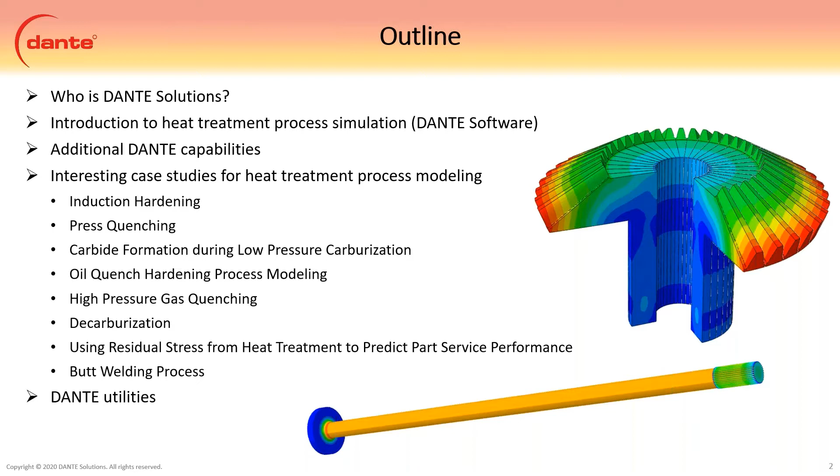A quick outline: who we are as a company, and then an introduction to our software. We also have additional Dante capabilities available within our models, and then some interesting case studies, which include induction hardening, press quenching, carbide formation, oil quenching, high pressure gas quenching, decarburization, and then using residual stress and loading models to predict part service performance, and a quick animation of a butt welding process. We'll wrap things up with a quick overview. Also, we have some Dante utilities available to help evaluate material and to get material parameters into the Dante model from experimental results. We'll go through those quickly though.

A brief introduction to who we are. Dante Solutions was founded in 1982 with a main focus on modeling thermal processes, and in those early years a lot of it was on forging simulation. However, in the early 90s, Dante Solutions was brought into a large collaborative project between industry, academia, and our national labs, and the purpose of this was to predict distortion in heat treatment.

This project ran from 1992 to 2000, a long project that really tried to nail down the physical phenomena of heat treatment and the resulting distortion. This was brought about because industry was having such a difficult time with heat treat distortion and the amount of money they were spending on scrap. Dante Solutions then became the sole owner of the Dante software in 2000, and we've been responsible for the development and furtherment of the software since then. A lot of work has gone into the models, the algorithms, and the material data.

So this has been a 20-year adventure, we'll call it. Originally, the name was Deformation Control Technology. So if you see any papers or publications from prior to 2014, you might see that name associated with our employees, particularly Lynn Ferguson and Charlie Lee. Also, we had an employee that did a lot of publications back in the day, Andy Freeborg. So any of those guys, if you see their names on papers with Deformation Control Technology, that's us.

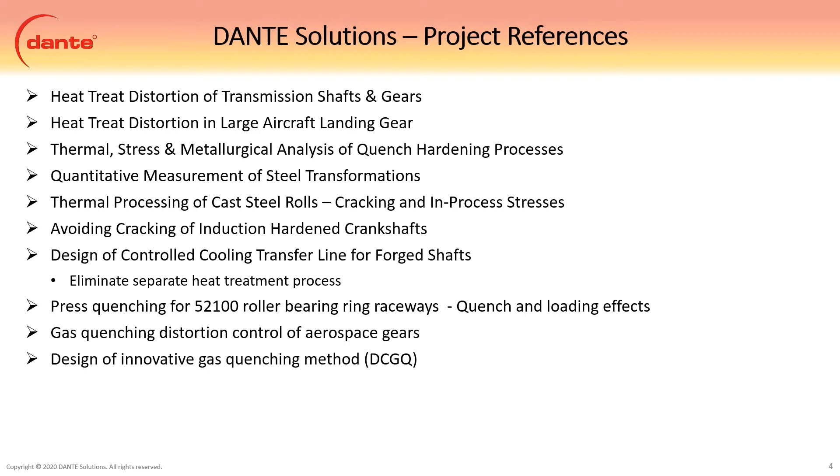We've looked at normalizing processes to improve them, bearing rings, gas quenching distortion of aerospace gears. And the last one is we actually recently designed an innovative gas quenching method that we've tagged Dante Controlled Gas Quenching, that actually controls the temperature of the incoming gas to control the phase transformation gradients. It's a great means to reduce shape distortion from the non-uniform transformations that occur during gas quenching. You can't get rid of the size change from going to martensite, but you can get rid of shape change.

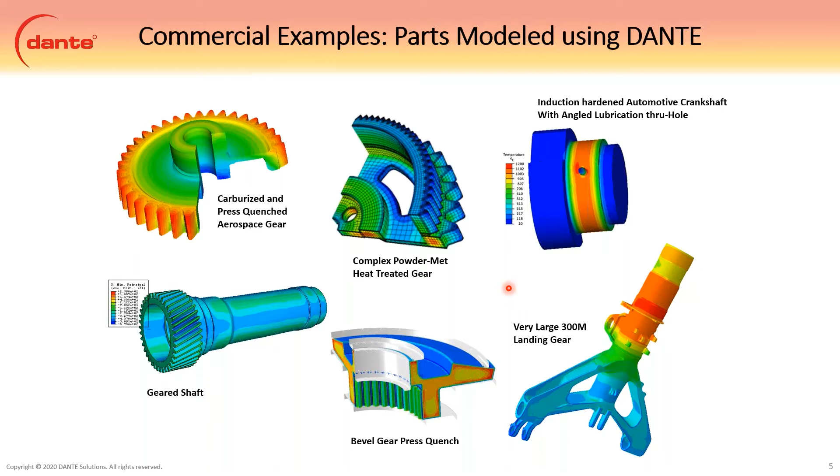All right, so what is Dante heat treatment simulation software? It is a commercial finite element based software that is used with ANSYS or Abaqus. So in order to use Dante, you got to have ANSYS or Abaqus. And we did this so we did not have to focus on the actual solving - there are great solvers out there, and those folks have put in a lot of work and effort to optimize their solutions, so we just use their ready-made solutions for the solvers. And most engineers are familiar with Abaqus or ANSYS, so it's kind of a streamlined transition to start using Dante.

I was going to try to show some quick examples, but I just found out that my license for Abaqus expired this morning. We're all still working from home, so I have to borrow licenses, and yeah, it's expired. So I'll try to do something, but I can't promise anything at this point. That's kind of my fault.

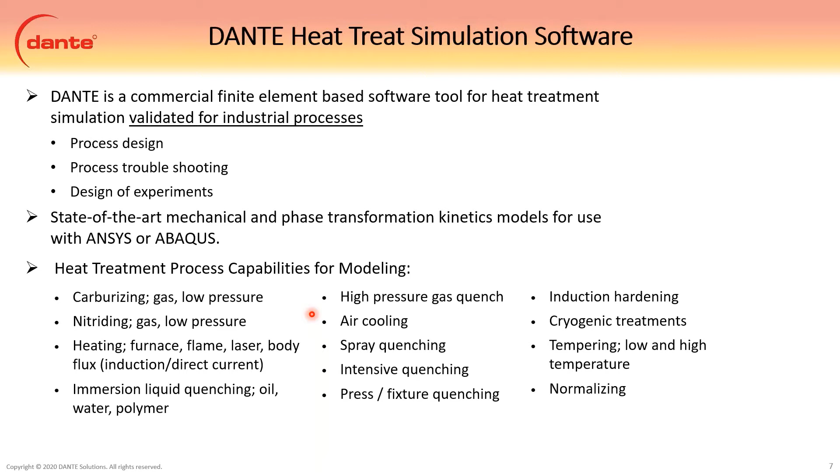The dotted lines are less important. We do have models for them, though generally we don't use them, mainly because the deformation is small, and particularly the heat generated by plastic deformation isn't needed. However, if you do forging models and you want to include the transformation after cool down, then it should be used.

This is particularly important for things like sheet metal stamping. Like I said, we need phase transformation, multi-phase mechanical, TRIP models. We've got to have a mixture law in there because you can have elements that are more than one phase at the same time. And then tempering models, as well as carburization and nitriding models.

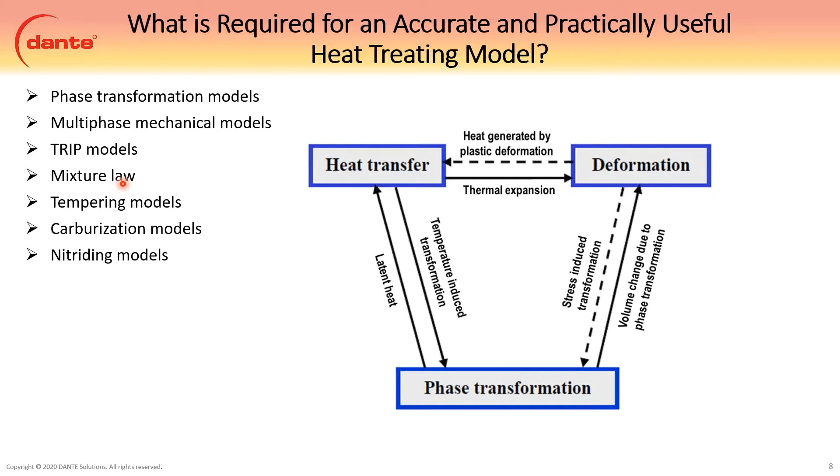So all of this must be included to accurately model a heat treatment process. Heat treatment modeling is probably one of the most complicated phenomena to model because of the wide temperature range and the wide range of solid state phases that are possible. So there's a lot to consider here. This is why we've been developing it for the last 30 years.

So, Dante function structure: everything we do here is heat transfer driven, and generally we use heat transfer coefficients. Flux can be used, but it's a little bit harder to know exactly what the outside environment conditions are when you use flux. So we use heat transfer coefficients.

Diffusion, phase transformation, mechanical models - all of this is included, as well as a standard database. So if you're using a common grade of steel, or one that's reasonably close to a common grade of steel - and I know India uses different standards for steel than America, but generally they're really close.

And then also there's a custom user material, so we can add a custom material that is specific to your company, so we don't have to share that with everybody else. That's if you want to do the testing and fund projects to get everything fit, or you can do the fitting yourself, but there is that capability to have your own material data for your specific grade of steel.

Finite element based, and then our outputs include volume fraction of phases, dimensional change, residual stress, and hardness. And everything except for hardness, because it doesn't make sense, is predicted in process. So you can see the changes as they occur, so you can see where your problems happen, or when the good things happen, right? So it's a very powerful tool in that regard.

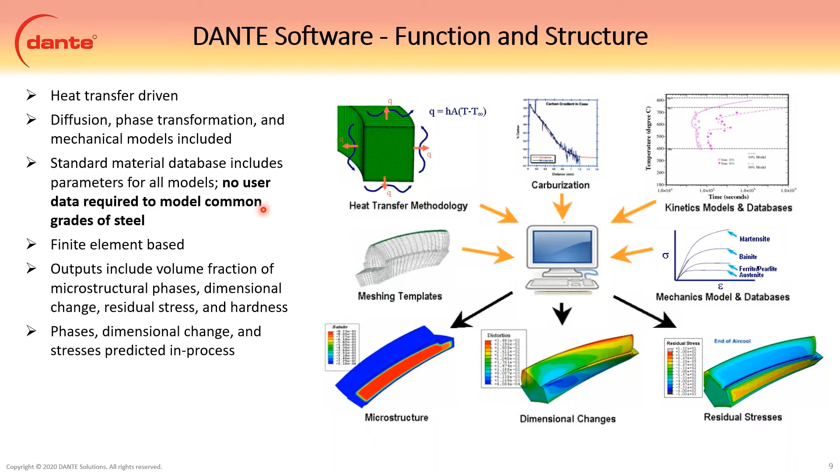You're just not getting what happens at the very end, because you can measure that physically. It's what happens during the process that we're really concerned about here. So that's where Dante is a very powerful tool.

Our file structure here, real quick: we got our user subroutines, and as I mentioned, you've got to have ANSYS Mechanical or Abaqus Standard to link with. There's a small processing database that has generic heat transfer coefficients for oil quench, air cool.

I think there's a water quench in there, oil. So there's a couple of furnace heating options. So there's a couple of generic data sets to start from. If you don't know your system behavior, we can at least get in the ballpark, at least get close.

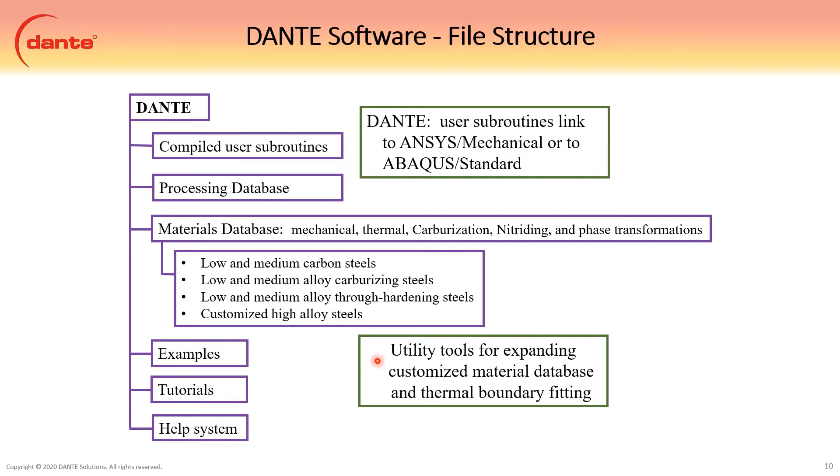Then we have our material database. I think I have a figure in the coming slides that shows some of the steels we have. Then we have a bunch of examples so you can see how certain models are set up, some tutorials that go step by step in setting up some simple models, and then our help system. Like I mentioned, we also have some utility tools available.

All right, so the way that we normally run these is we sequentially couple them, which is the figure on the left. So we'll run a carburization model and get a carbon distribution. That carbon distribution will then get mapped to what we call a thermal model, which will be the actual heat treat processing steps. That'll get us our temperature history, which is then read by the stress model, which gives us the distortion, residual stress, and microstructure. So it's a three-step process, and because the distortions are small, it's possible to do it like this.

If the distortions are larger, like for hot stamping, then you can couple the thermal and stress, but it generally takes a little bit longer to run, but the accuracy is better. And if you have large deformations, it's necessary because the thermal properties can change a lot quicker.

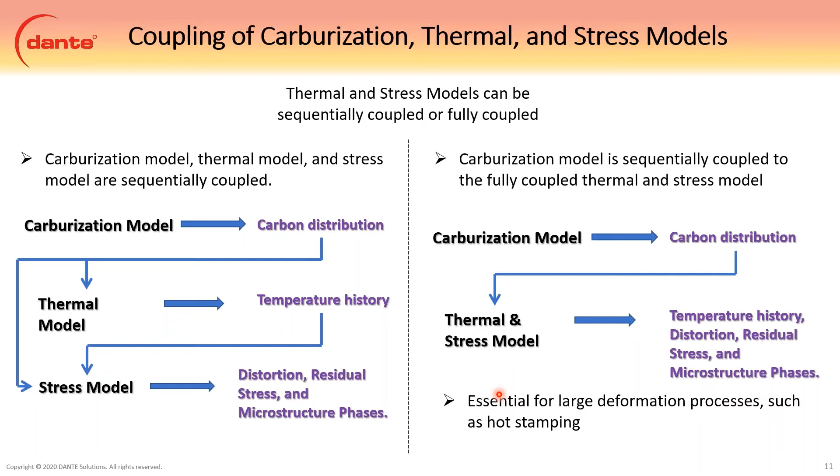All right, our models. Below on the left is our general form of our phase transformation models. For obvious reasons, I can't put the full model here, but it can be determined from dilatometry or TTT diagrams.

However, we do prefer dilatometry data because it provides diffusive and Martensitic phase transformation information. It provides the coefficient of thermal expansion and the transformation strains. So we get a lot of information out of one test, whereas the TTT diagrams just get us the diffusive transformation information. There's nothing about martensite except for a start and a finish temperature generally, and there's no thermal expansion or strain information at all.

So if it comes from TTT diagrams, we just assume something close and we borrow that strain. So we can get reasonably close, but it won't quite be accurate. So dilatometry is the way to go if you're going to measure phase transformation behavior.

The figure on the upper right is our representative internal state variable model. And we use an internal state variable model instead of the classical stress-strain relationship because it captures the hardening and recovery that happens during the process. And that's not possible with a conventional stress-strain relationship. So the internal state variable model handles all of that.

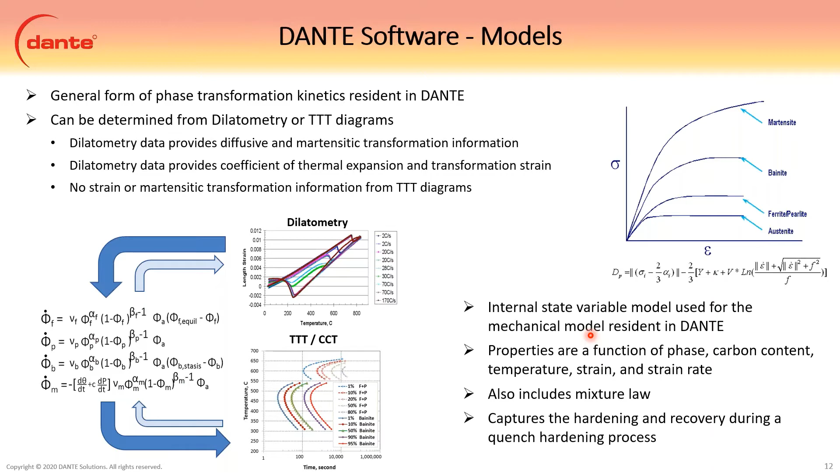All right, so here's our material database. You can see some of our standard materials. Any of these materials that have an XX at the end indicate that there's multiple carbon levels of data.

So the carburization process can be modeled more accurately because carbon has such an effect on material properties, it has to be considered. So we can see 4000 grade, 4100 grade, 4800, 5100, 52100 bearing steel - so it's just got one carbon level in it - 86, 9300. So you can see the common grades, especially to aerospace and automotive.

But inside of that material data is phase transformation properties, thermal and mechanical properties, carbon diffusion, nitrogen diffusion properties, and also microstructural and alloy effects are all included in these material properties. So this is a big deal because it's a lot of data for each material that has to be tested for. So to have this coming in is very helpful.

And like I said, if you're close to one of these - and this isn't all of them, there's more, I couldn't fit them all here - if you're close, then generally we can make some small modifications to the hardenability if it leans one way or the other relative to these alloys, and at least get you close without doing any testing. And then you can do some minimum testing to kind of fill in the blanks. So starting from here, a lot less testing is involved.

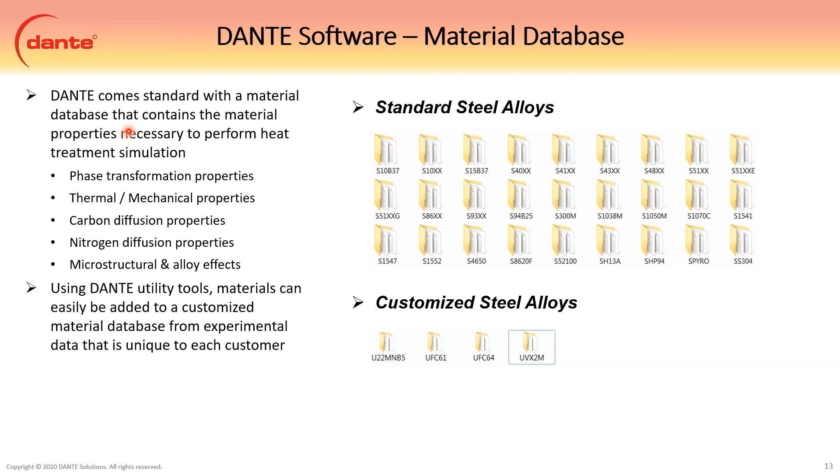All right, thermal boundary conditions are absolutely critical, and each system will behave differently. Even identical equipment models will behave differently. It's just a fact of nature that every heat treater has to deal with. So we highly advise that vessels be characterized - heat transfer coefficients as a function of part surface temperature should be tested for and determined. We do offer advanced support for that, and we have done a lot of testing as far as heat transfer characterization goes. So we are very experienced in this.

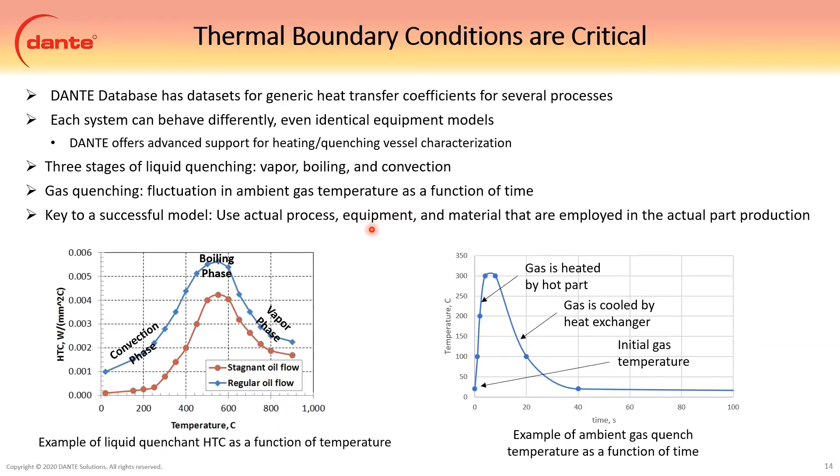This was a large landing gear with thermocouples welded onto the surface. We actually prefer to get them embedded just a little bit, but this works. Then we build a model and fit the heat transfer coefficients from there.

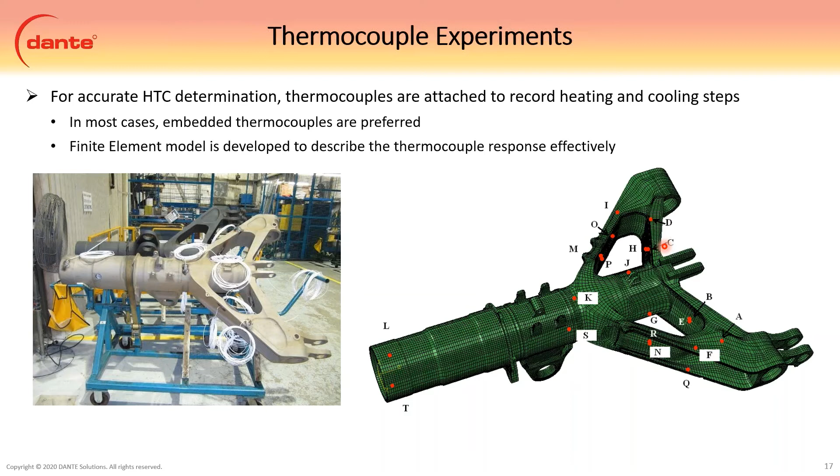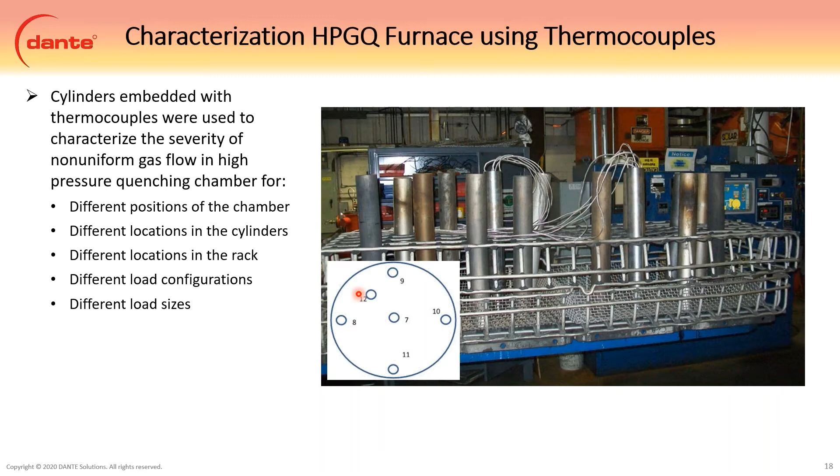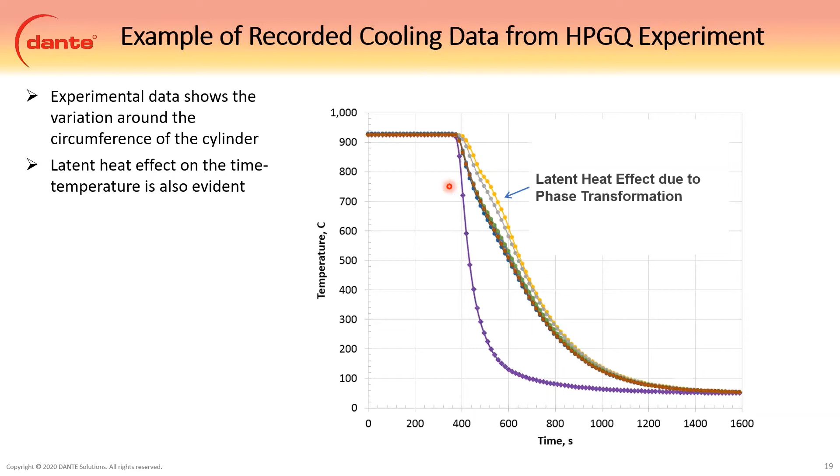These are the thermocouple temperature measurements that go around the cylinder, so you can see there's a difference circumferentially due to the gas flow. You can also see the bump here, that's from the latent heat during the assumed ferrite pearlite transformation.

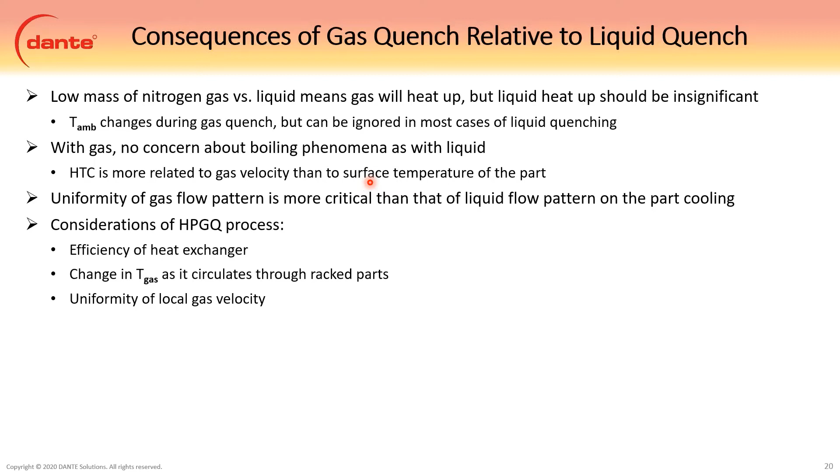We can skip this, I'm pretty sure he shared this. You guys can read this just really quick, what the difference between gas and oil is and what needs to be considered, but I want to get through some of this other stuff.

Other Dante capabilities: we can consider the alloy composition on phase change. This example shows if our molybdenum goes from 0.2% to 1.2%, you can see the shift in the ferrite pearlite and bainite noses. Everything goes to the right, so it essentially makes it more hardenable.

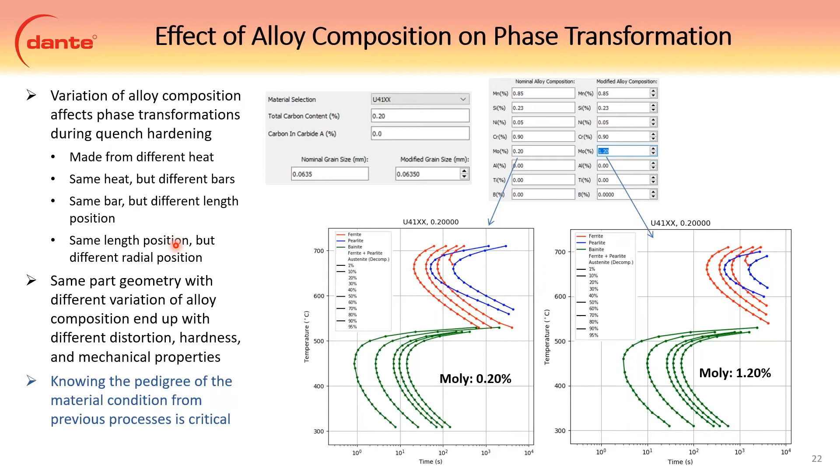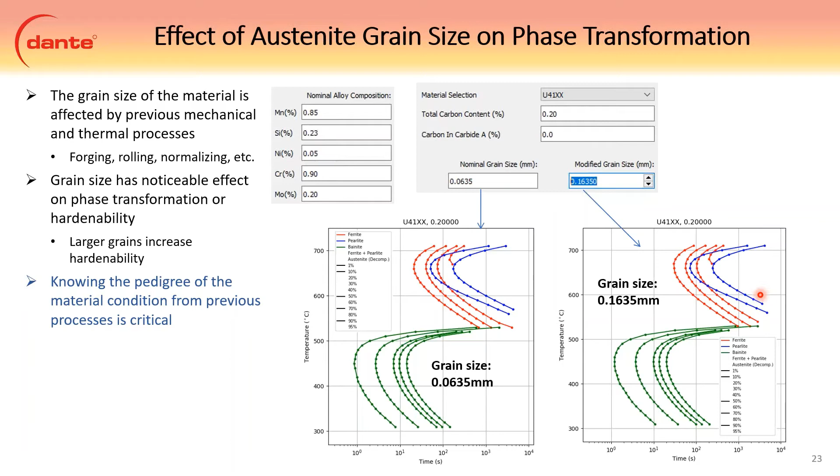We can also consider the effect of austenite grain size. This grain size is in millimeters, so we're from 63 microns to 163 microns. Again, you can see the shift to the right, so larger grains make it more hardenable.

The effect of initial phase on phase transformation. The first cycle here is annealed condition, most likely ferrite pearlite. Then this blue line is the retest of the same sample after being quenched to martensite, so this blue curve starts as martensite. This volume shrinkage that you see here is actually the material being tempered at high temperature, and you can see the effect on the transformation strain and total strain from the austenite transformation.

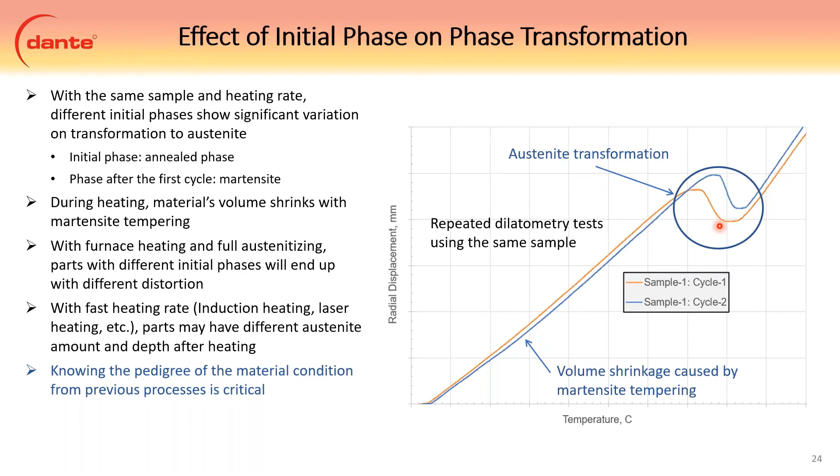So depending what phase you start with, you're going to end up with different strains, and this shows it really well. The blue line is starting with pearlite. These are all simulation on this figure. This figure was actual test data, so this other figure is all simulation.

The second is high temperature tempered martensite, and the gray curve is low temperature tempered martensite. You can see they all start at the same place, but they all end at different places. So the start of the initial phase is absolutely critical. It is really important to know your initial material structure, phase, grain size, alloy composition - all that's very important to know.

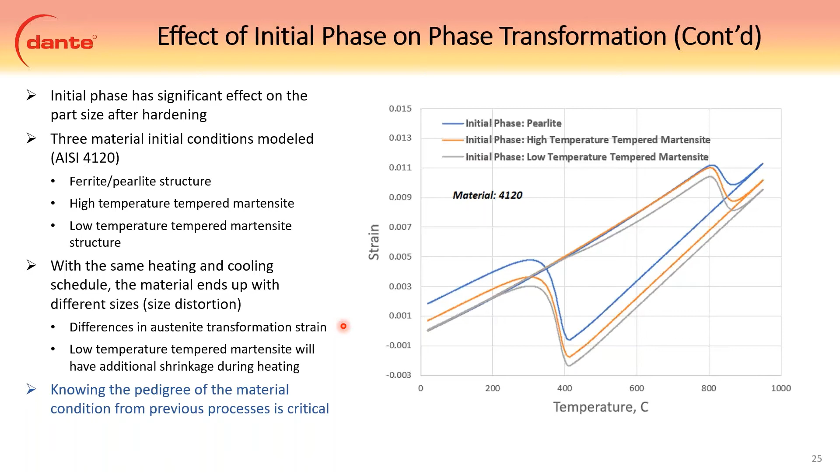We can also model the effects of initial carbides on phase transformation, and it affects the phase transformation, because all that carbon that dissolves from the carbide then goes into the surrounding austenite matrix, which raises the carbon of the austenite, which then increases the hardenability.

So these top left and bottom two all show 850 with a medium size carbide, small carbide, and large carbide, and you can see this is the carbon going into austenite. The small carbide dissolves really quick, whereas the large carbide dissolves very slowly and doesn't even fully dissolve in this time. Then this is the medium carbide size figure on top right at 950 instead of 850, so you can see we go a little bit quicker at higher temperature dissolving.

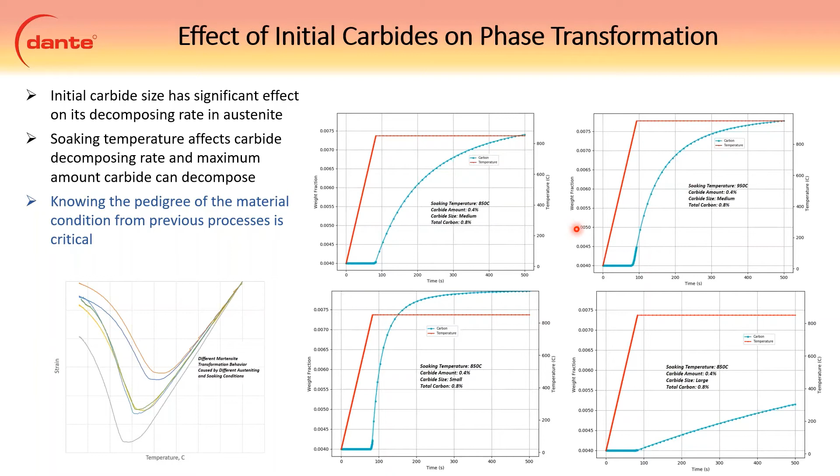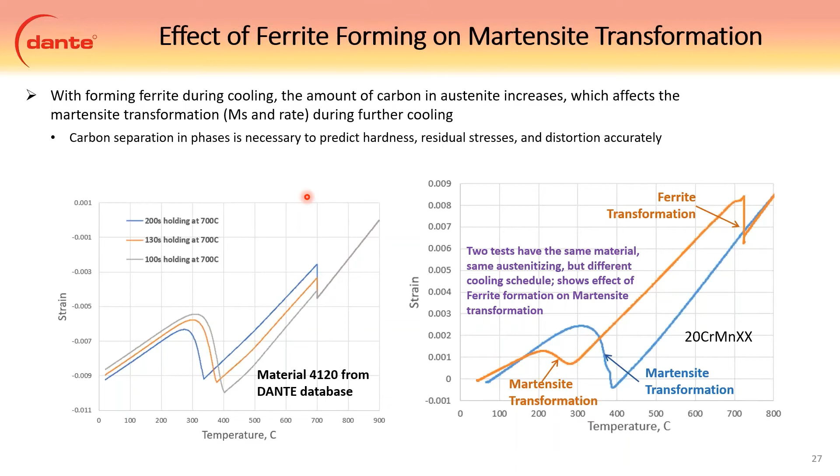The effect of ferrite forming is also similar to the carbide. As we form ferrite, we reject carbon because ferrite can't hold very much carbon in solid solution, so that carbon then goes into the surrounding austenite matrix, which then increases the hardenability. We can consider all of that.

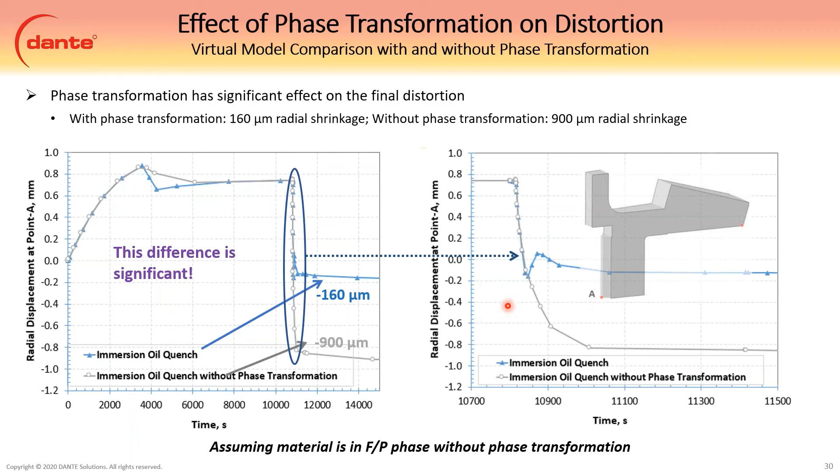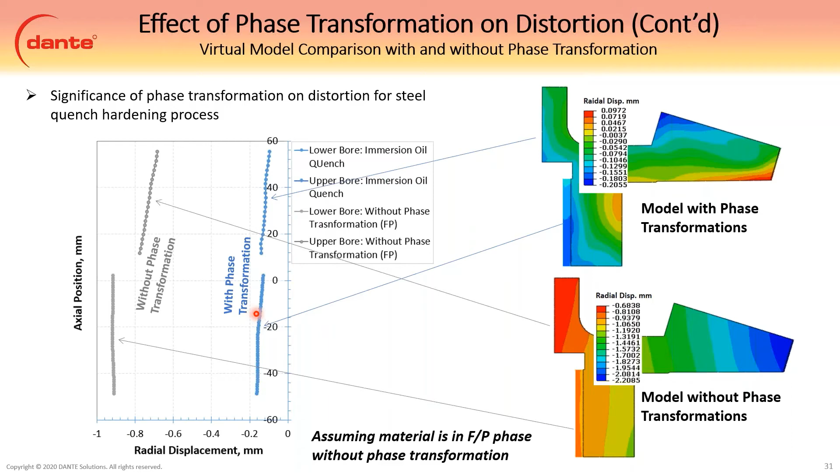And that's looking at this point down here on the spline. If we plot the top portion of the inner bore and the bottom portion of the inner bore, you can see the difference. You get the same shape, essentially, but it's tremendously different in the amount of radial displacement. So phase transformations do make a huge difference in the final distortion - huge difference. Okay, so that is it for the Dante portion of it.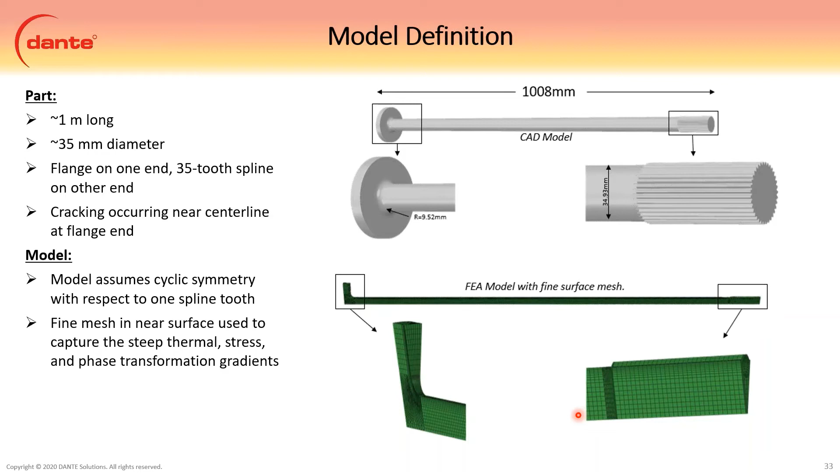So this particular model, the electromagnetics were modeled by Fluxtrol using Flux 2D. Then the power density, the Joule heating as a function of time and position, was mapped into the Dante thermal model to predict the temperature history. Once we have the temperature history, we can run the stress and get the displacements, the residual stresses, and the hardnesses.

The Joule heating can also be defined by the user based on actual component case depth and microstructure. By doing that, that gets us a baseline of what the process does right now. We can then use that to modify and see how we can improve or optimize the process.

So we can play with power levels - what happens if we put more power to it, less power? You can essentially manipulate the frequency by modifying how deep the Joule heating goes, because frequency dictates how deep your electromagnetic waves get inside the part.

This process consisted of a 9-second dwell at the flange to let the thermal energy build up. The inductor then moved up the shaft and slowed as the spray quenching began. Then the inductor was shut off once it got near the top to keep the end from cracking.

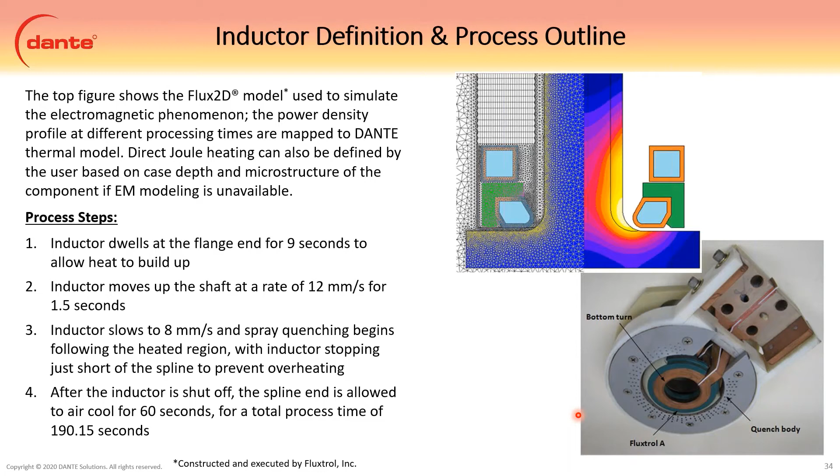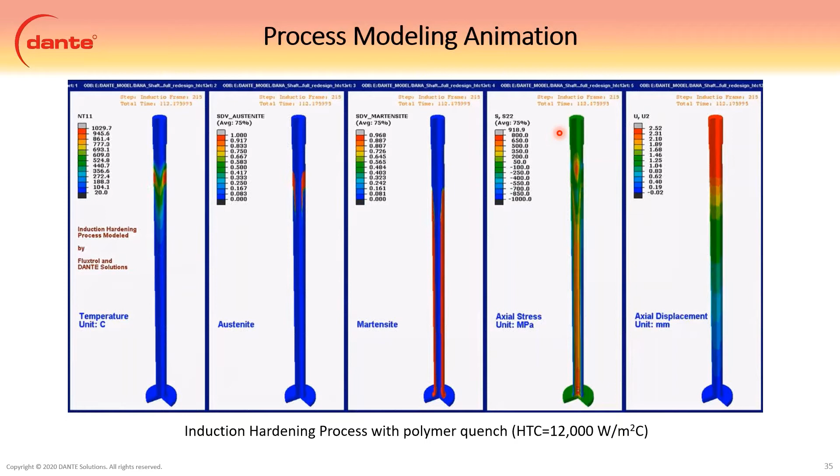I'll let this run through so everybody can take it in, I know it's a lot with being 5 figures. But this is a scanning process.

So what we ended up doing for this was we wanted to see the effect of quench rates on the stress.

So we had to reduce the tension. That's kind of what ended up occurring - they just reduced the pressure in the spray to reduce the heat transfer coefficient.

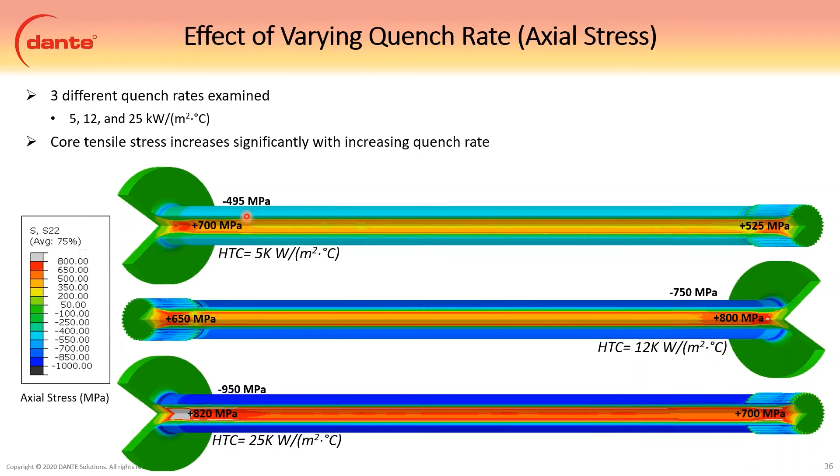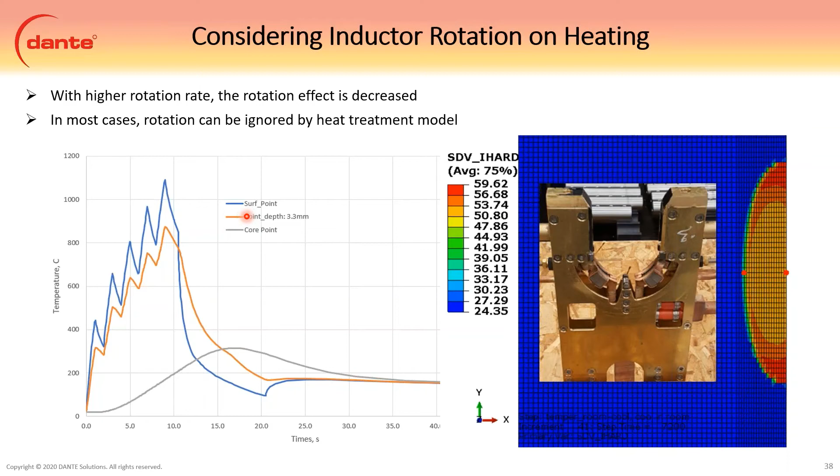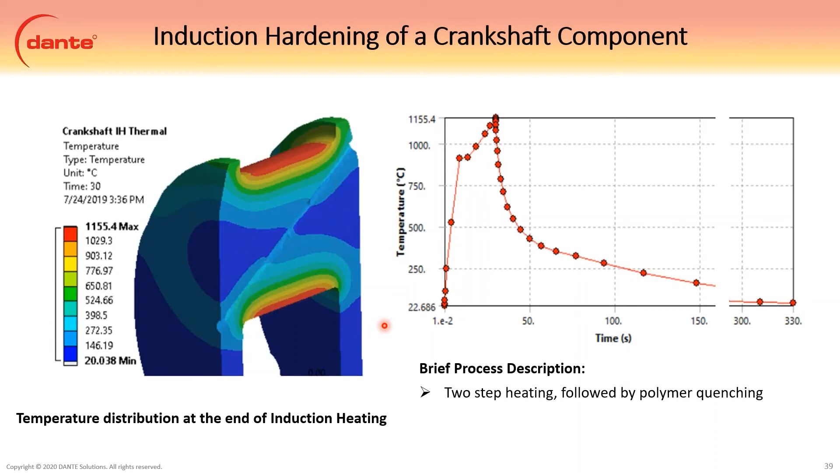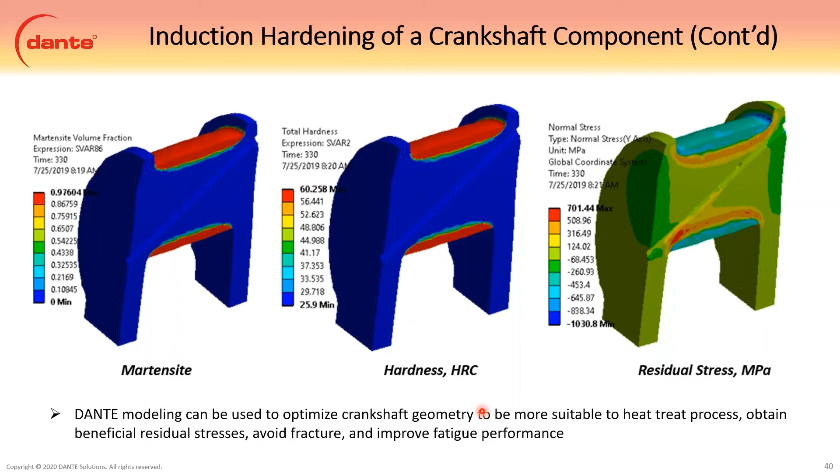All of this was per Gleason practice, so we worked with Gleason on this. They're a manufacturer of heat treat equipment, do a lot in press quenching. They were getting almost 60% failures from the original process without pulsing.

So pulsing essentially relieves pressure of the upper die, which then allows the part to shift. Without releasing the load on the upper die, it constrains the part too much. And this is something that we wanted to look at.

So what we wanted to look at mainly was we wanted to be able to predict the location of high in-process stress and see where and when it was cracking. And then we wanted to determine what the effects of friction and quench flow rate were on this stress.

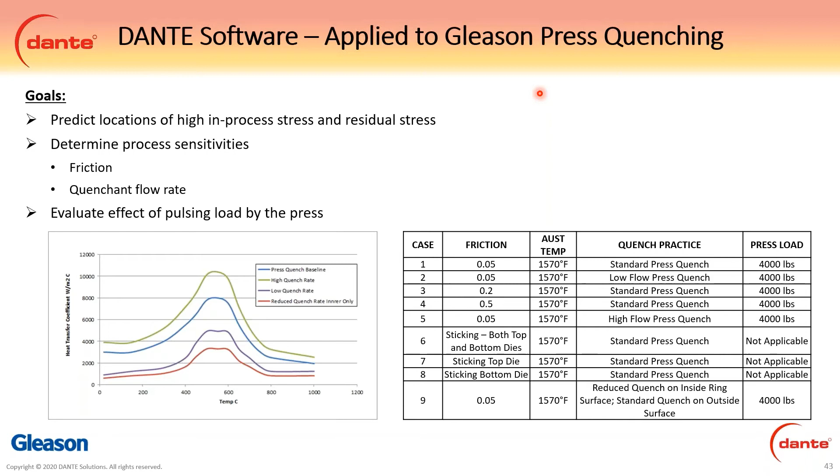So here is an animation. From left to right, we got max principal stress, temperature, and martensite. Our area of concern here is on the bearing race, and you can see it right there at the end.

You can see it happen right at the end - it goes to red. But the reason for it is the martensite transformation in the core, tied to the fact that these dies - this is actually a friction condition - and you still get a high stress over there. But it's because the martensite transformation in the core goes. Once that happens, it pushes everything out and actually tries to open up the bearing race, which puts a bending moment on the bearing race.

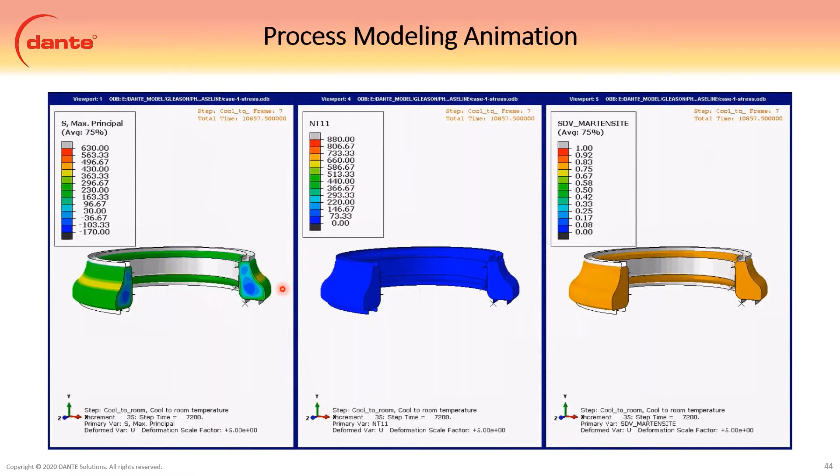This is just a quick plot showing stress from if you have a low friction press quench compared to an immersion quench or a free quench without constraints. So you can see the effect of the constraint and the friction. This also has to do with the slightly higher quench rate as well, so there's kind of two things going on here.

But we can show all of that, right? So these two lines are temperature, the dotted lines are martensite transformation, and then these squares are the stress. So we can see, you know, where it comes from, right? Here's your martensite transformation, but your stress - and this is all just at the surface.

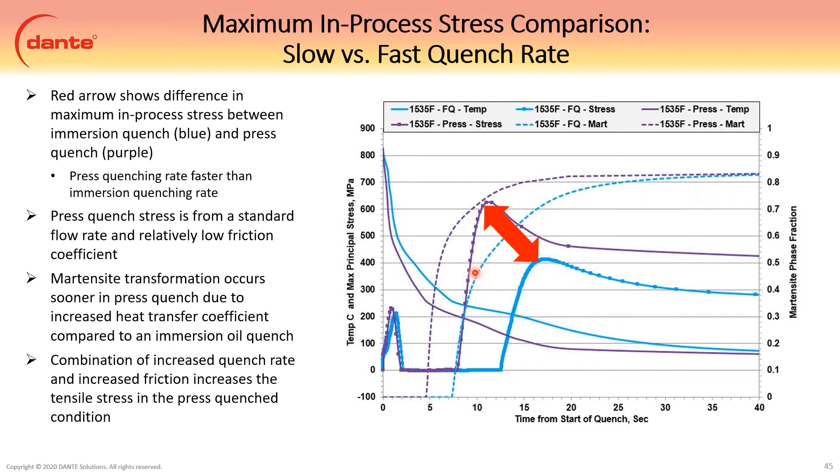So you have to keep in mind that it's not the surface stress that's causing this, or the surface martensite transformation that's causing this stress - it's subsurface martensite. So you really need a couple more plots on here to really drive home what the cause is.

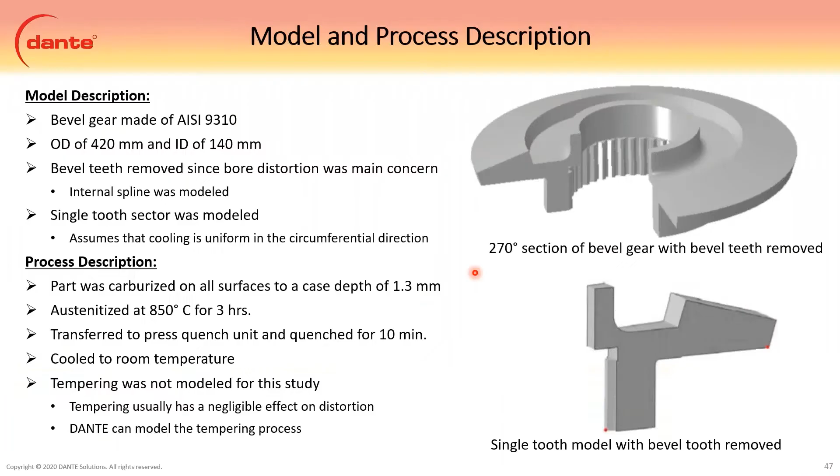At 15 minutes roughly. All right, so press quenching 9310 is just another press quench model. The main thing to take away from here is we can locate the dies - if there's a gap, like the bottom was shimmed, right, then we can model that.

Carbon profile, I don't think we've seen up until now. So there's a carbon profile.

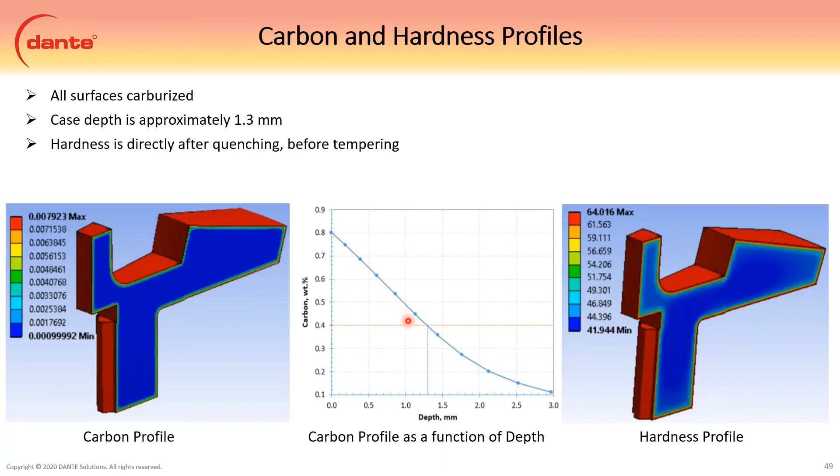This was an interesting study that I want to talk about just for a brief second. So what happened here is that this is the top portion of the bore, so it's this portion, and this is the spline down here.

So the blue line is what would happen without constraint - so if I just dumped this in an oil tank, this is the prediction. The gray line was the process that the customer was currently using. And you can see, especially on the spline, it actually made the distortion worse.

So their thought was, by constricting it, I'm going to make the distortion better, but in reality they were making it worse. So what we did was we came in and said, okay, forget the expander, which essentially puts a load on the bore, and said use a plug, which is a solid cylinder that goes inside of the bore. That's the green line.

So we reduced the distortion of the bore substantially. However, we end up with this big taper. So what we said was, okay, we can get rid of the taper by using an inverse taper. We essentially reversed the taper in the plug.

By doing that, we force it to be straight. We ended up with this brown line, and we end up with a little bow now, which isn't bad. That's still pretty small. That's about 10 micron, 5 micron, or sorry, about 20 microns. So that's relatively small.

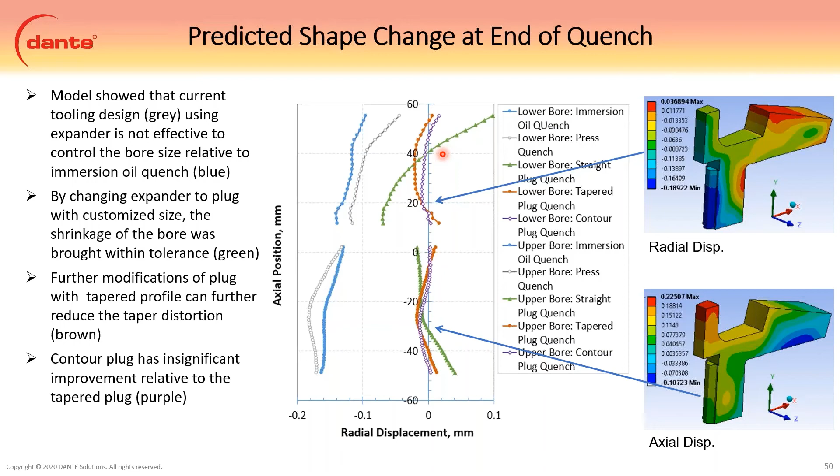So your accuracy isn't exact, but you're close. You can still see these trends, right? So what if this is actually an extra 10 microns over? You see the trend, and that's a very, very powerful tool. You still might have to run a couple experiments to really dial it in, but you've just eliminated like a dozen previous experiments that would have been complete failures. So like I said, very powerful.

Carbide formation. This is huge, especially for high alloy steels. You cannot model the carburization, low pressure carburization of a high alloy and some medium alloy steels without considering carbide formation. Why is this? Because as you pump in carbon, you saturate the austenite, and then you start to form carbides.

Those carbides grow. So our plot on the right shows the blue lines down here are carbon in austenite. The gray line is the carbon that is in carbide form, and the orange line is a combination of the two. So you can see we build a carbide up, and that carbide then dissolves during the boost stage.

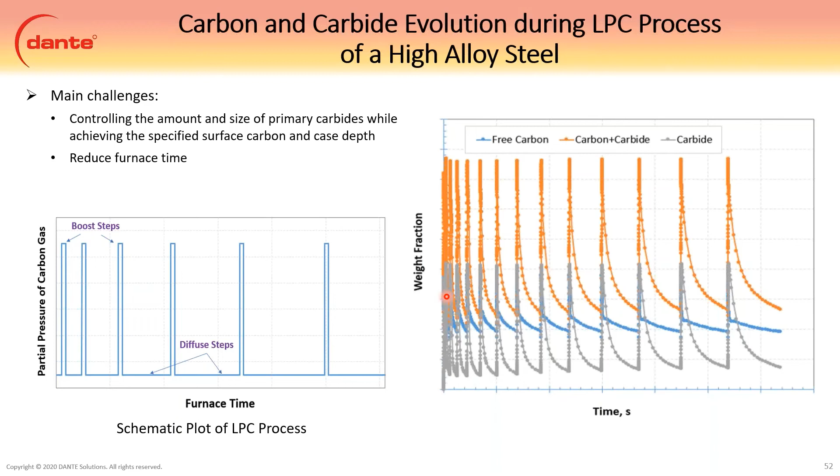So low pressure carburizing is: I boost, I give it acetylene, which is a carbon source, for a couple minutes, and then I suck all that acetylene out to a near vacuum, and I let the carbon diffuse, reducing the surface carbon. I then put acetylene back in, let the carbon build up, suck the acetylene out, so it's a repeating process. And as the carbides dissolve, they provide additional carbon to the matrix. So you have to consider them, or else you're under predicting the amount of carbon and the case depth that is actually there. So Dante has this ability.

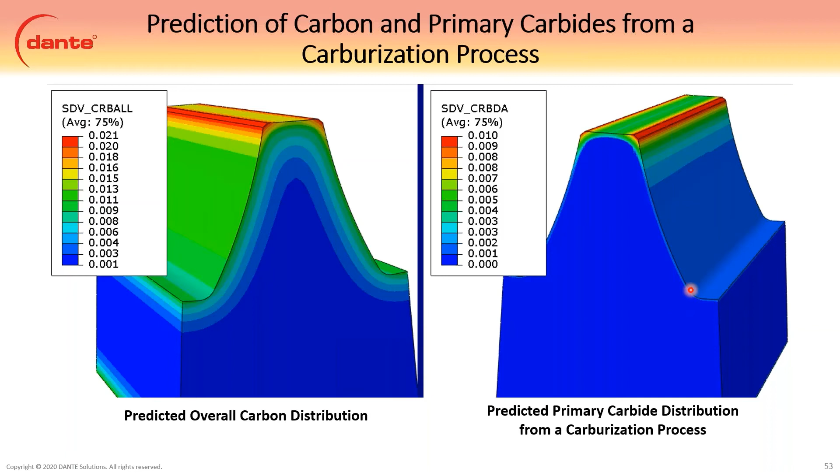This is just a still shot. Let me think about getting an animation in here now that I look at it. Anyway, on the left is the overall carbon, so you can see we're almost at 2% in the corners up here. The figure on the right is the amount of carbon that is in carbides, and you can see we got about 1% in the tip edge, about 0.5% everywhere else up on the tip. And then as we go down, we substantially lose carbides. So light carbides down here on the flank and in the core, but a bunch up here on the tip.

All right, oil quenching of a landing gear. I want to go through this really quick, just mainly show the animation, but we were looking at bow distortion of this guy, and this is really big, several meters tall. This is a really big landing gear.

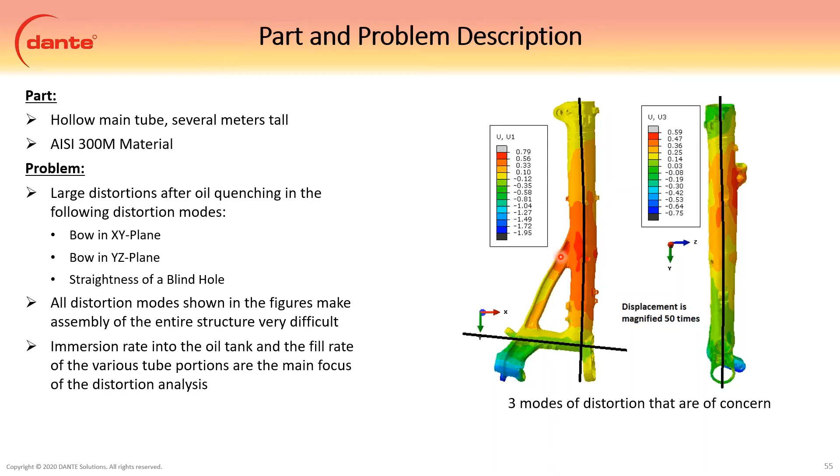So the immersion process into the oil is a big deal. As this gets dumped down into the oil, it fills up the hollow tube in the bore, and it also fills up this tube out here. All of this is very significant, so Dante can model that immersion process. Smaller parts, that immersion doesn't matter - it happens so fast that you can consider everything uniform. But with long parts like this, you have to consider the actual immersion of the part into the oil tank.

Skip over that. So this is left to right: temperature, austenite, and radial distortion - so horizontal distortion. And you can watch with the temperature. So here's the oil filling up the bore. It fills up this tube a little bit faster, was our assumption, because of the pressure. So it fills it up. So this is looking inside, these are all on the outside.

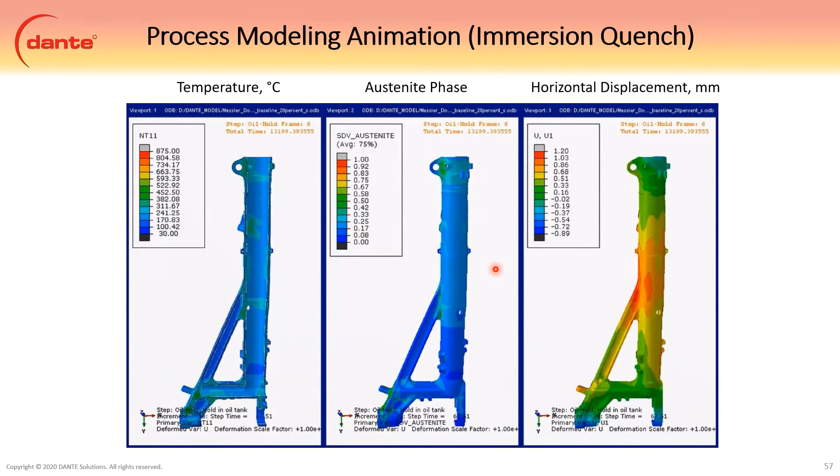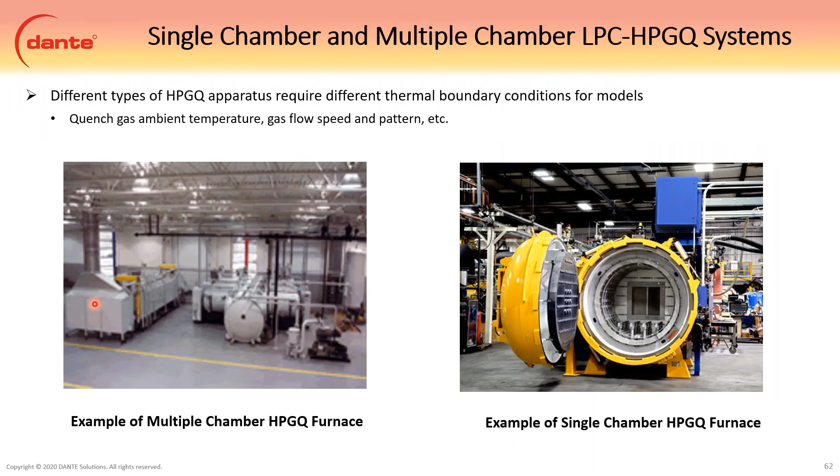High pressure gas quenching - we've done a lot of work with high pressure gas quenching. There's a couple examples of different high pressure equipment, multiple chambers and single chambers, and we'll get into that.

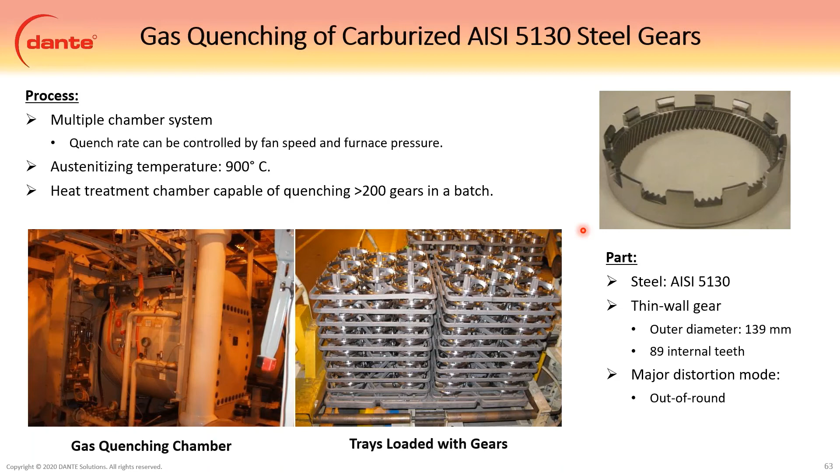So we looked at some ring gears, and particularly of significance was the out of round distortion. So this thing was becoming like egg shaped. It's not something you can see physically, but it's turning egg shaped. What they were doing was trying to manipulate the quench by manipulating the fan speed and the pressures, which then essentially just affected the heat transfer coefficient.

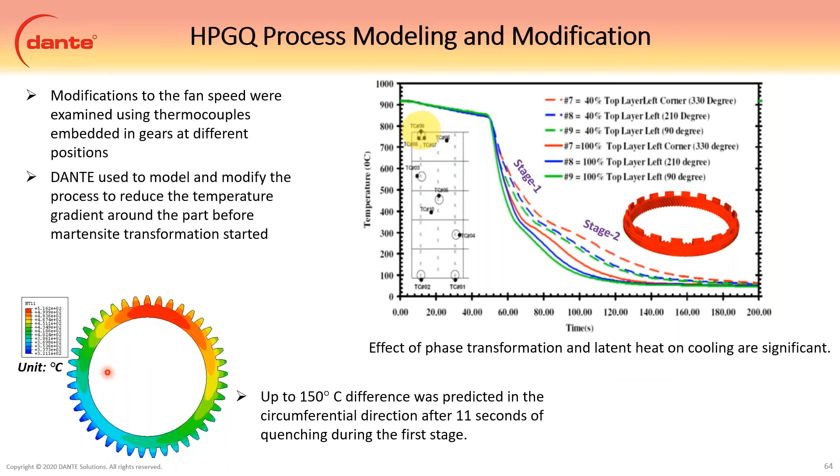So Dante had no problem modeling this. You can see a couple of the experiments that we ran, but these are differences around the ring itself, so there was a lot of temperature non-uniformity going on here. You can see in the figure on the bottom left from the simulation that there's up to 150 degrees Celsius difference within the ring, which leads to significant distortion, because your martensite transformation is starting over here and like 70% complete over here in the core, where over here it's 0. This little bit around the outside is insignificant to the overall distortion.

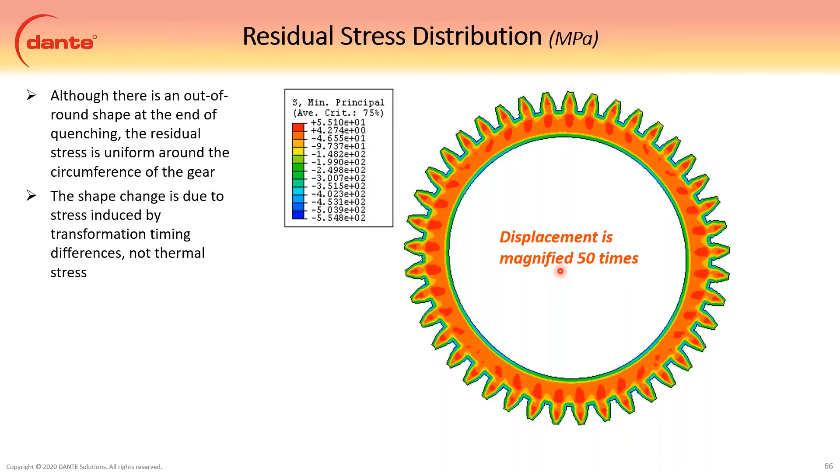It's this bulk core material that's going to drive the major distortion. And the interesting thing is, even though it's hard to see - this is still magnified 50 times but it's hard to see - even though this is out of round distorted, the residual stress is still perfectly uniform. So it has nothing to do with non-uniform residual stress and everything to do with this non-uniform transformation.

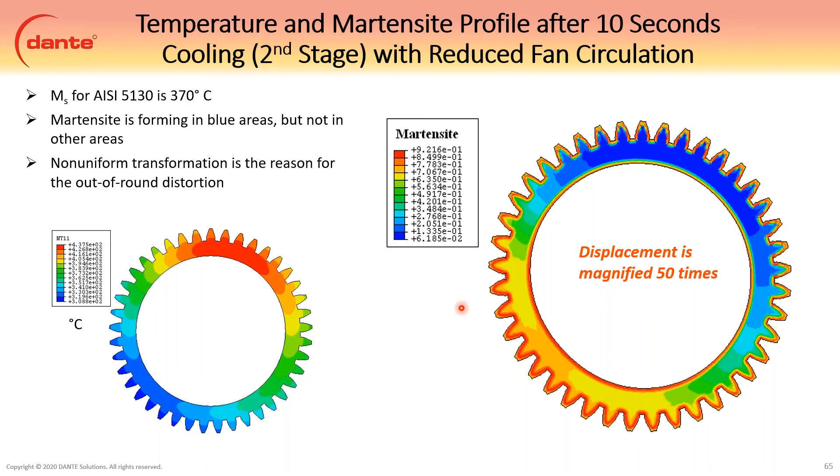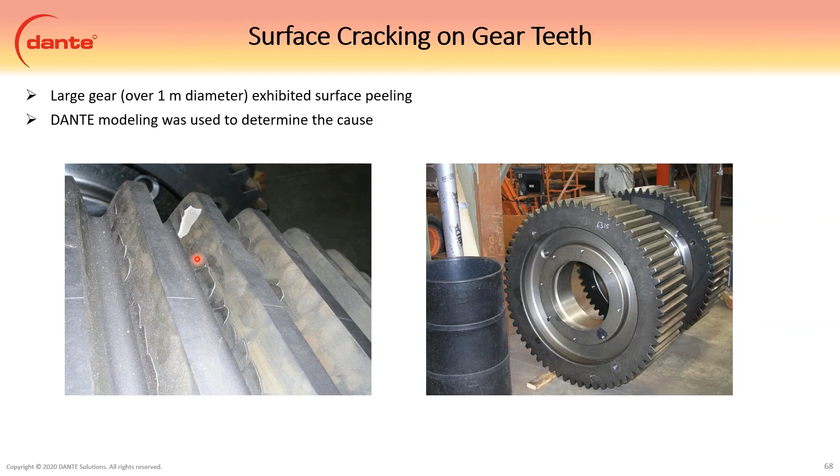Decarburization we can model - this was peeling of a gear. Just looking at decarb, without decarburization we predicted a high compressive residual stress, and there was no reason this thing should be cracking. It was cracking during the final grinding process - you can see as they ground it, it would start peeling. So we predicted all should be good and it should not crack.

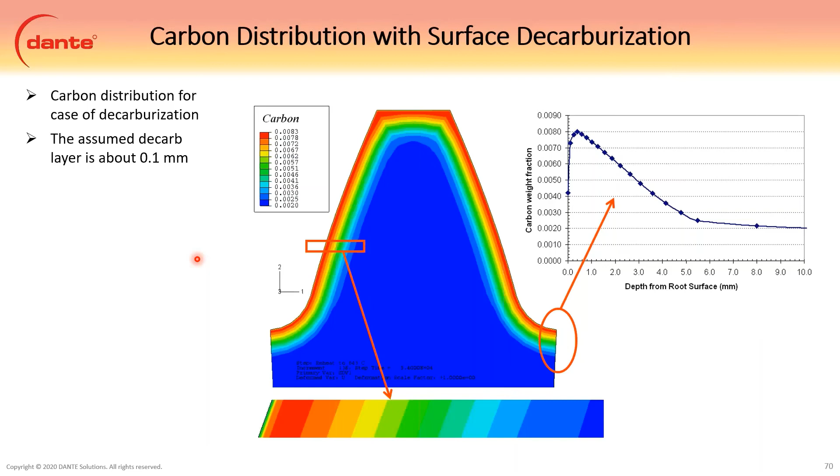So we looked at what happens if this thing is decarbed 0.1 millimeters, and then we predict a shallow surface tensile stress, which would cause the peeling. This is shallow - this right here is probably about 100 microns maybe, so it's not too deep, but it is there. It says the tensile stress goes 300 microns.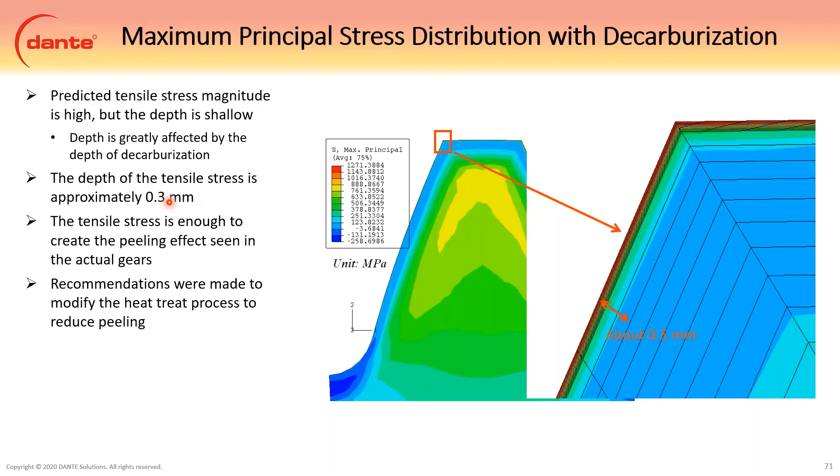I just want to show this real quick, we're running out of time here. These are test gears that we were modeling, using different processes to induce different residual stress magnitudes.

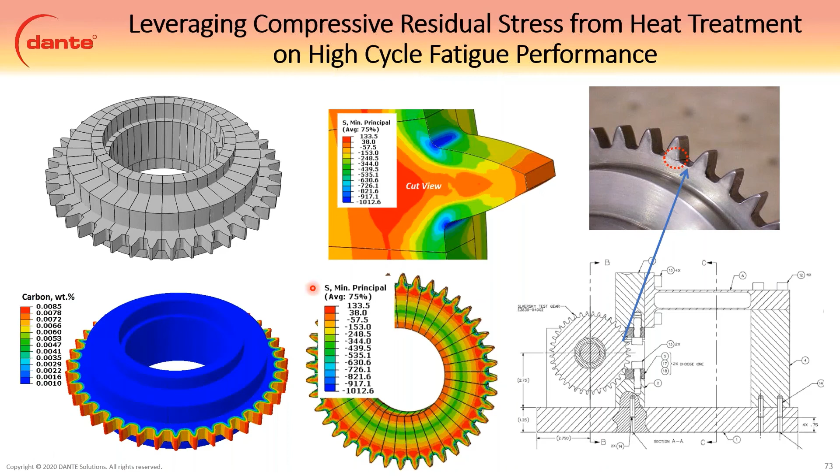So right, how do you fail? Dante can be used for that. So if you're running loading models, the residual heat treatment stress from Dante can be mapped into your loading models.

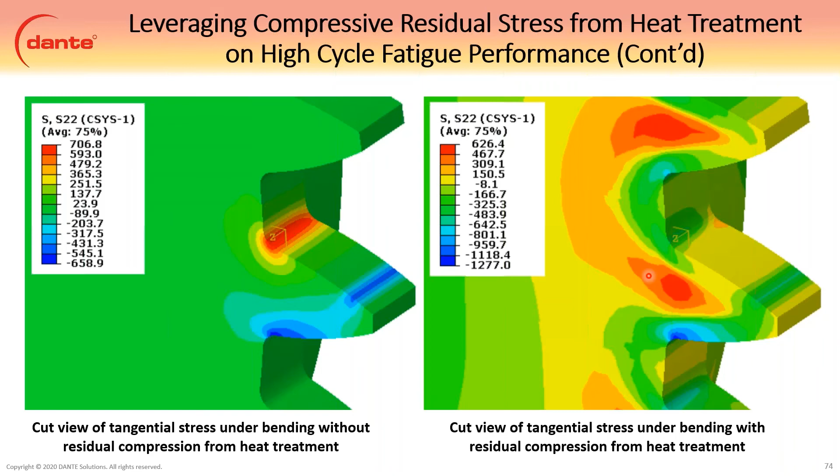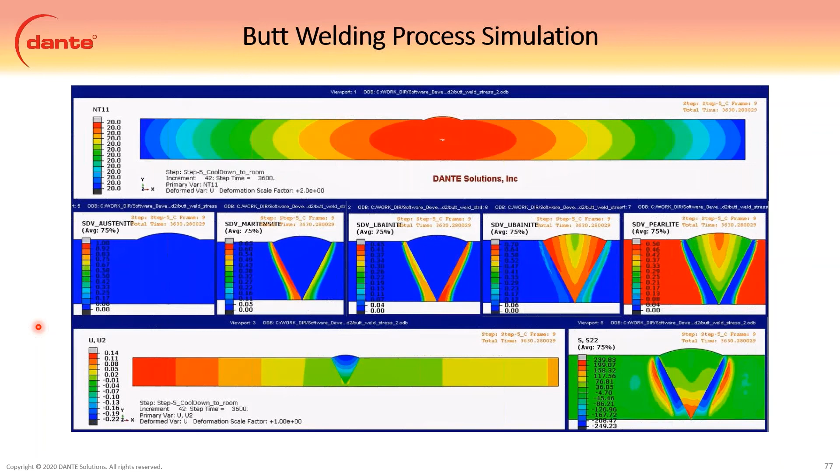Quick, this is butt welding. There's still a lot of work going on as to how to model welding and additive manufacturing processes efficiently. It can be done, this kind of shows it, but this isn't the most efficient way to do it. One of our colleagues, Charlie Lee, has been doing a lot of work with this lately. Hopefully we have some good progress here over the next year or two, and ANSYS and Abaqus are also working on this problem of how to model an additive manufacturing process, laying it down layer by layer.

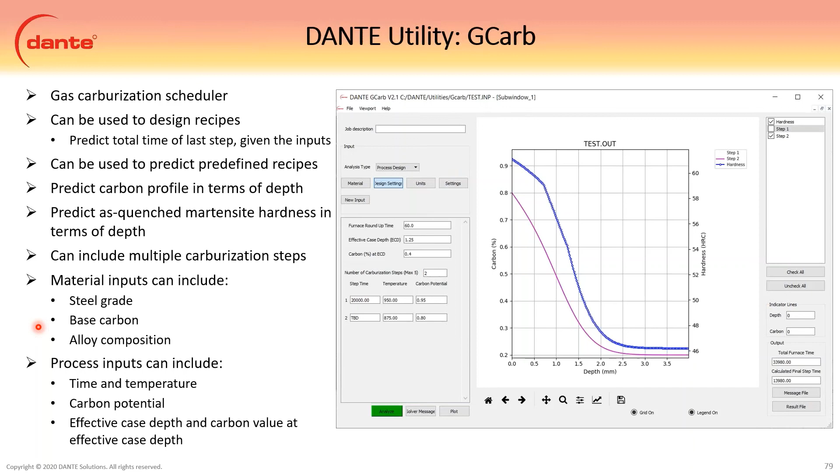Some of our utilities here, really super quick: we have GCarb and V-Carb, which are used to model carburization processes and to help design recipes for carburization processes. Material simulator, which will use user-defined heating and cooling curves to predict phase, hardness, strain. So it's a good way to get a quick feel for what a material's doing.

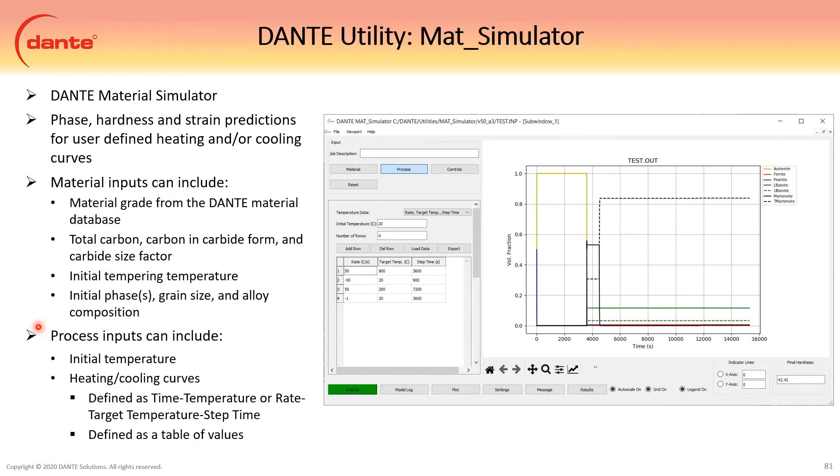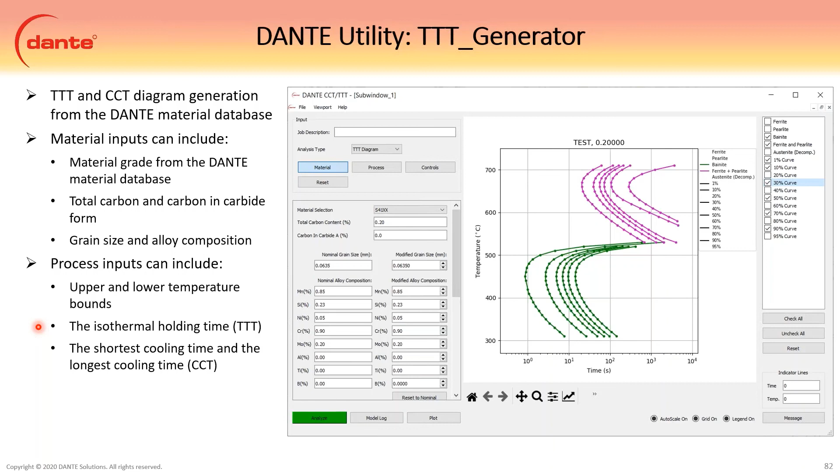TTT generator, which will predict and display TTT diagrams and also CCT diagrams from Dante Materials. Jomini predictor, kind of self-explanatory there.

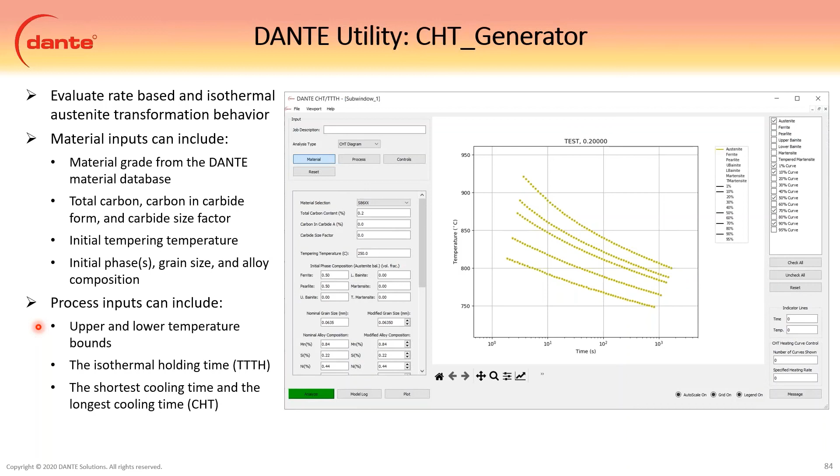CHT generator allows for the evaluation of isothermal and rate-based austenite transformation behavior. A lot of work has gone into this area over the last year or so. Generally, we had been ignoring the rate-based austenite transformation because there's so much going on the cooling side of it, but we feel that the rate-based austenite transformation deserves more work, so we've been putting a lot of effort into this, and I think it's come along quite nicely. This little utility will let you evaluate how the material behaves as far as the austenite transformation goes. So all of those were predictive.

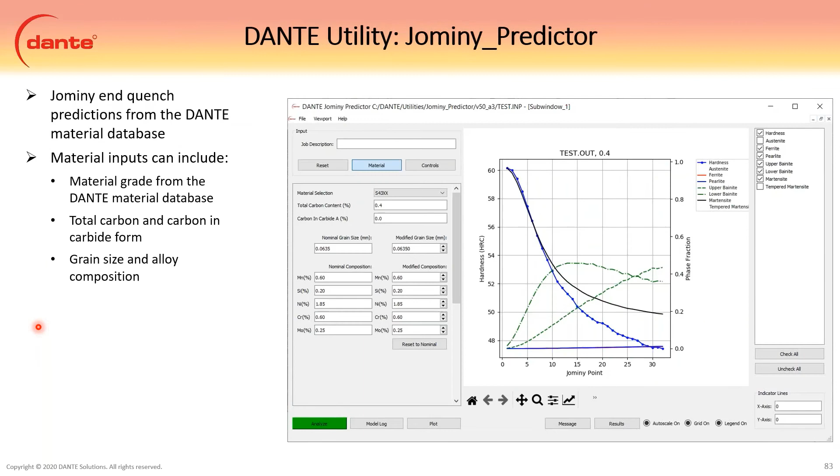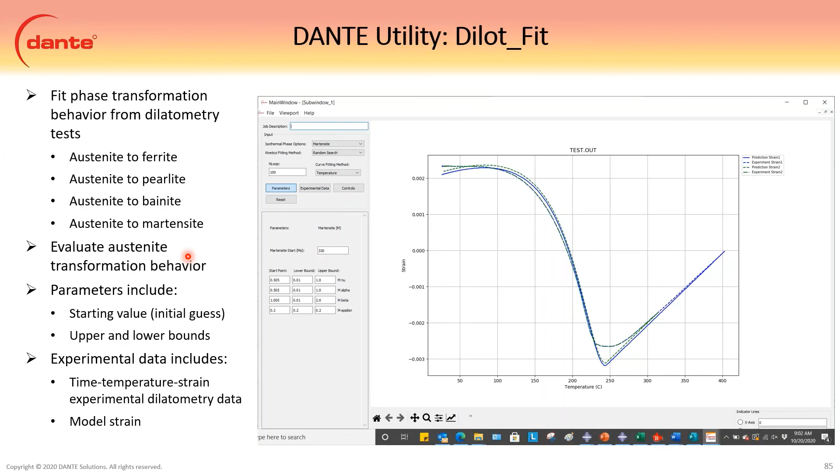These last ones are fitting tools. The previous ones can all essentially be used on their own without Dante. However, the fitting tools don't make any sense unless you have Dante because they fit material test data to our model parameters. Dilot_Fit takes dilatometry data and fits the austenite transformation to all the diffusive phases and the martensitic phases. Mec_Fit takes standard compression tension tests and fits them to our internal state variable model.

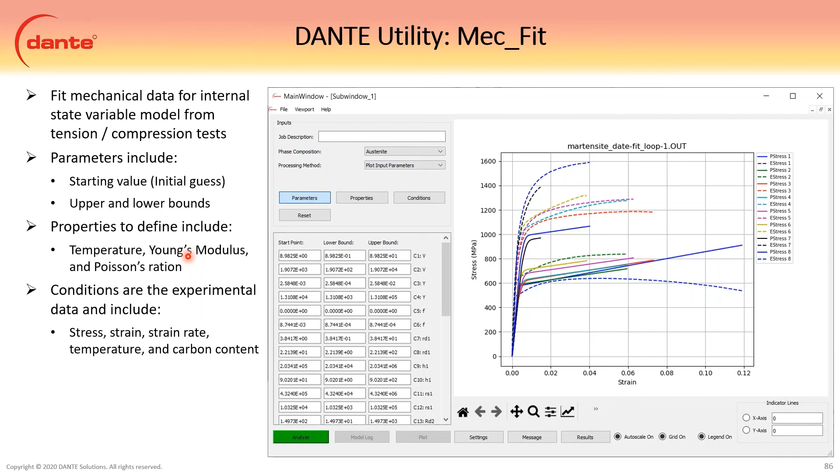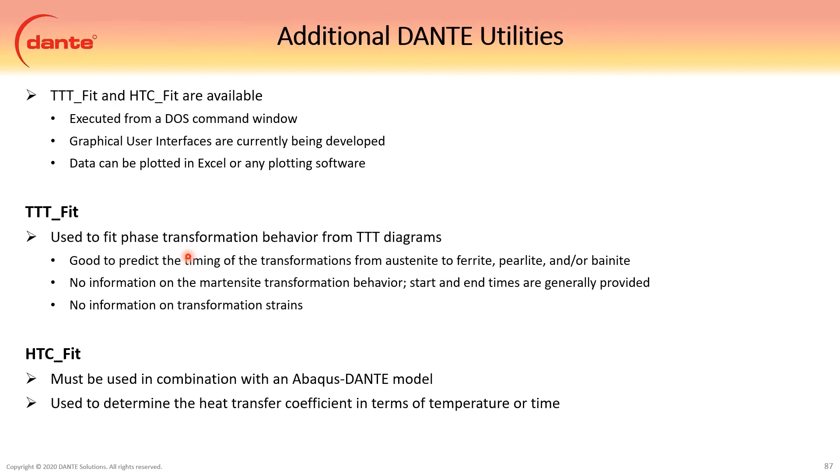Then we also have a TTT fit and a heat transfer coefficient fit, which use TTT diagrams to fit the phase transformation behavior, and HTC fit uses thermocouple data to fit the heat transfer coefficient. Both of these are currently being worked on as far as graphical user interfaces go. So they're still available, everything just has to be done through a command window and plotted in Excel for right now, but they're on their way.